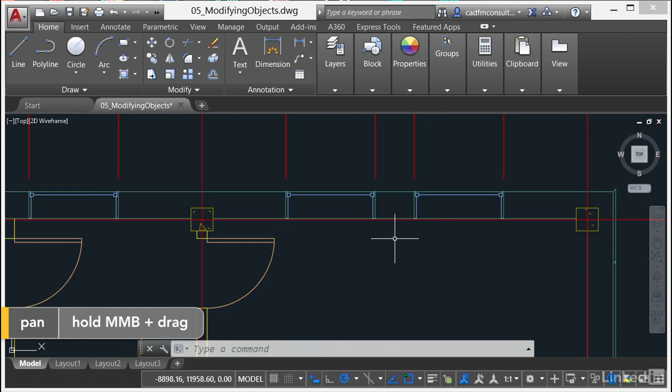Now you'll notice I'm in the named office view. If you're not in the named office view, just go to the view control, click here on the view name, custom model views, and select office like so. And what I'm going to do, I'm going to zoom in on that little bit of wall just there at the top. So just pan a bit, zoom a bit on the mouse like so. And we're going to draw a line that represents a center line, and then we're going to stretch it and we're going to lengthen it, and I'm going to show you how to do that with both commands.

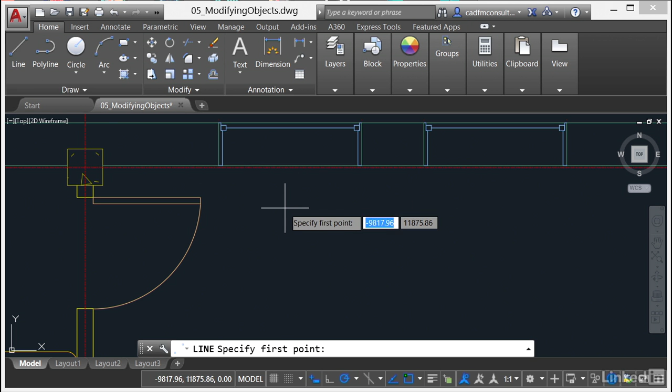So on your layers panel on the home tab on the ribbon, make sure that you're on the right layer. So we want I wall, internal wall. There it is there, that yellow layer. So make sure that's our current drafting layer. Then go to the draw panel here and select the line command. Now I'm not just going to go and click on any old object snap. I'm going to do a shift and a right click. So hold down the shift key, right click, and you want a mid between 2 points.

Now as usual, because my screen is small, that's kind of gone off the screen. So let's be sensible and hit escape once. Shift and right click, there we go, so we can see all of the menu. And it's that one there. Now mid between 2 points only shows up on the shortcut menu when you do the shift and the right click for the snaps. Be aware of that. It's an override snap. So I'm going to click there, mid between 2 points.

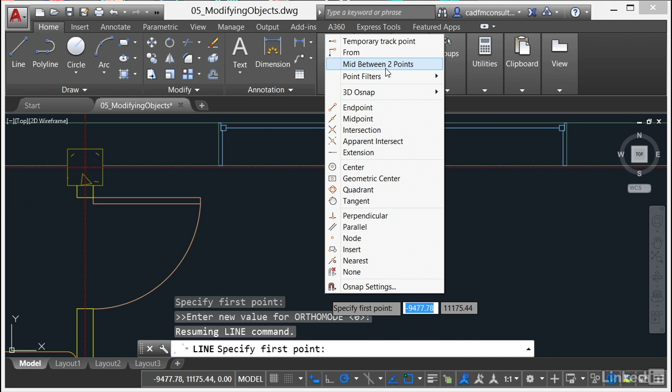I'm going to zoom in real close, and I want that endpoint snap there as my first mid, and that endpoint snap there as my second mid. And as you can see, I've now got the mid between 2 points. Zoom out slightly on the wheel, just roll back, drag the line down using the polar tracking. Make sure your polar tracking is on. And in the input box there, type in 1500, 1500 millimeters, 1.5 meters. Press enter, and there's our line.

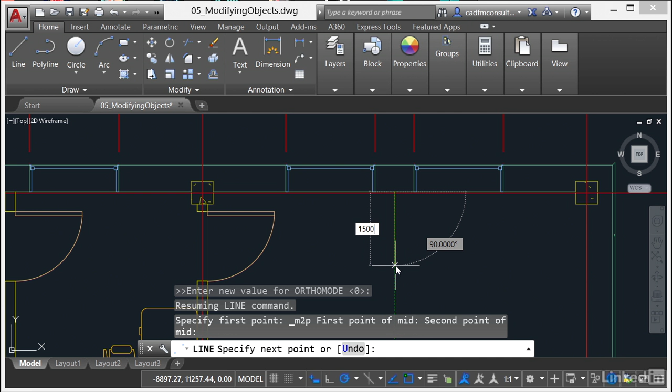Hit escape just a couple of times to come out of the line command, and there's our line that we're going to either stretch or lengthen. So it's right there like so. Now I'm going to zoom in a bit for clarity. There we go. And what we're going to do is we're going to stretch the line first. Now the line itself is just there, that one there. So I'm going to go to the modify panel here. There's the stretch command. I click there. Notice it says stretches objects crossed by a selection window or polygon. Now what it means is it has to be a crossing window or a crossing polygon.

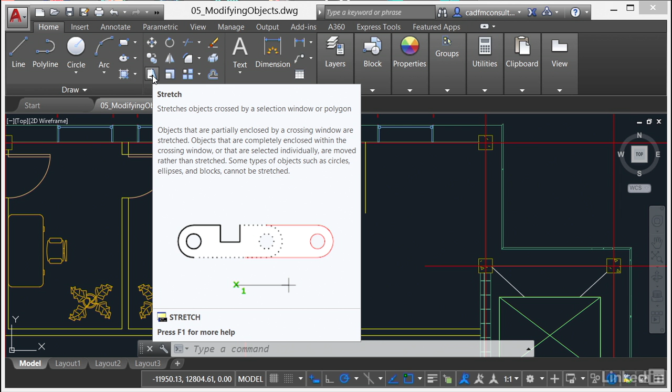So if I click on stretch, come into the drawing area, I'm prompted to select the object I want to stretch. It has to be a crossing window or a crossing polygon. So that's right to left. So if I come over here with the pick box, click once, drag the crossing window over like that, the green dashed one, and click again. That's how your stretch command wants the object to be selected. Press enter or right click to confirm the selection. You're then prompted for a base point.

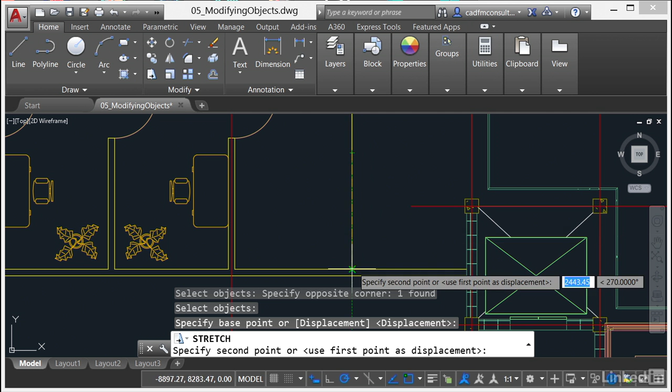Now what I'm going to do is use the end point snap of the line, click there like so, and I'll just pan upwards before I stretch it, and as I drag down, again use the polar tracking, otherwise you're going to get a wonky line. So polar tracking is on. When I get the intersection on the wall, I click there, and I'm done. So as you can see there, I've got a nice dead straight center line ready to start creating more internal walls here like this one and this one. Now that's one way of extending that short line.

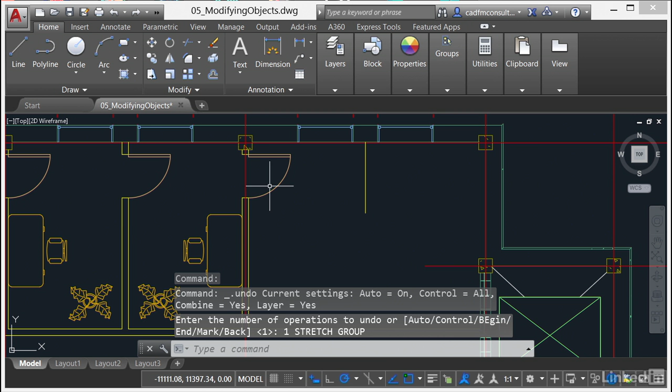There's another way, and it's called the lengthen command. So what I'm going to do, I'm going to jump up to the quick access toolbar and click on undo just a couple of times until my line is shortened again to this little line here. And then I'm just going to pan upwards a little bit so I can see the line a little bit more clearly. I'm going to go to the modify panel and click on the little flyout arrow here. And then I'm going to pin the flyout open using the little pin symbol. And I want this command here, lengthen.

So I click on lengthen, come into the drawing area, and again it says select an object to measure, or I've got 4 options: delta, percent, total, and dynamic. Delta allows me to extend the line by a distance. So it'll be a fraction of the line itself. Percent allows me to make it 100%, 200%, 300% longer, and so on. Total, if I know the distance, I can put in an exact total distance of what I want the length of the line to be. You'll notice the 4th option is dynamic. Dynamic allows me to lengthen dynamically to any known point.

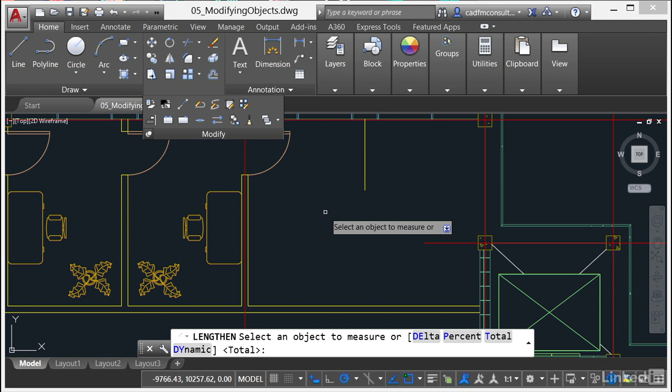That's the one I'm going to use to lengthen my line to make my center line to split the office space into two. So I can right click, it's also on the shortcut menu there, and I select dynamic. And I'm going to come up here and select the object to change. Make sure you click just on the end of the line there. Don't click up here because it will think you want to go upwards and go dynamically upwards. You want it near the end of the line that you want to lengthen. So there. And as I come down, can you see I'm dynamically lengthening the line?

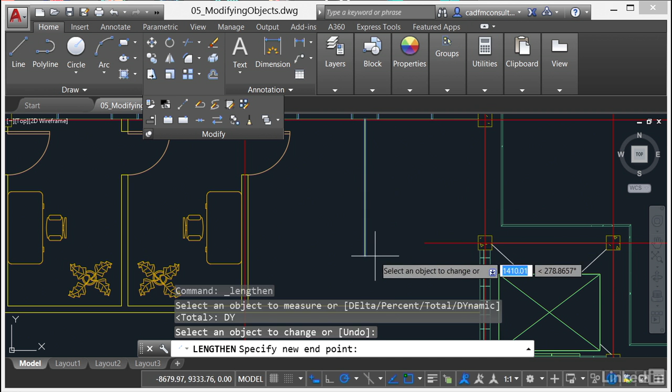I'll just pan upwards a bit, using the polar tracking to make sure it's exactly vertical. There's the intersection, click, and if I zoom out a tad, there we go. So what I've done there is exactly the same as the stretch command, but just using the lengthen command instead. So that's how you can stretch and lengthen objects when you're working in AutoCAD 2017.